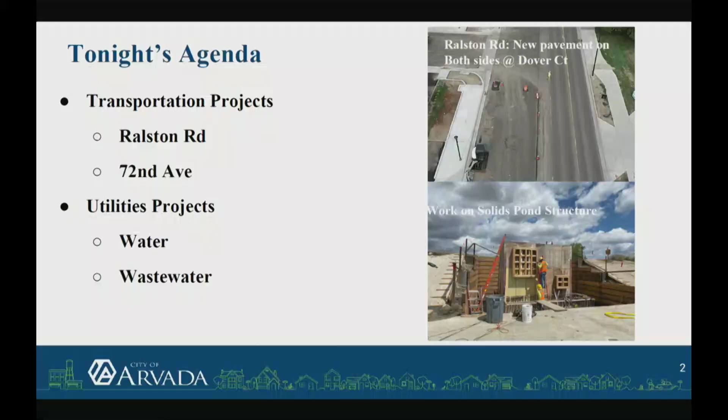He will kick it off and lead the presentation. Good evening, City Council, Mr. Mayor. Today we're going to talk about all our bond projects. Transportation projects, as well as all of our utility projects tonight. We'll go through our typical outline here. We'll talk about right-of-way, budget, construction phasing, schedule, challenges and risks, and community outreach.

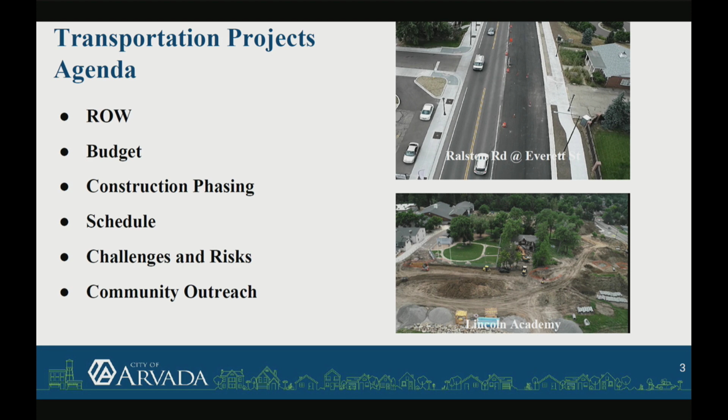And before I hand it over to Padmini to take it off with Ralston Road, I'd like to introduce David Bernard. He's one of our newer engineers, started in February with us, and he's been taking over the 72nd Avenue project since then. He comes with quite a number of years of experience in engineering, as well as geotechnical engineering, and has most recently been with Federal Lands, doing roadway projects kind of in the middle of nowhere. So now he's happy to be back in the Denver metro area where he lives. This is the opposite of the middle of nowhere. Exactly, yeah.

And with that, I will hand it off to Padmini for Ralston Road. Good evening, Mr. Mayor, and good evening, council members. Thanks, Britton. I'm very excited to give this quarter update on our Ralston Road Phase 2 project, because we actually completed a significant amount of above the ground work, which is visible to everyone.

So first I'll start my update with the right-of-way. We completed all the right-of-way requirements needed for the project, including temporary construction easements. We ended up spending 20% more than the initially allotted budget for the right-of-way requirements and services. Coming to the budget and expenditure, the initial budget allotted for this project is close to $19 million. The current expected budget, due to some of the design and right-of-way overruns, we are anticipating $22.5 million, which does not include the change orders we are currently negotiating with the contractor.

Coming to the construction phasing, this project is designed to construct in 3 different phases. The first is Notice to Proceed 1, where we plan to do a lot of utility relocations. Notice to Proceed 2 is planned for Estes to Yukon North Side widening. The bottom 2 lifts are already done. Garrison to Estes South Side widening was done recently. Moving on to NTP 3, the phase we are currently in, Garrison to Estes North Side widening, which was completed this quarter, and Estes to Yukon South Side widening, which is also in process. In the next couple of days, our contractor is planning on finishing up the remaining stretch of the south side widening bottom 2 lifts.

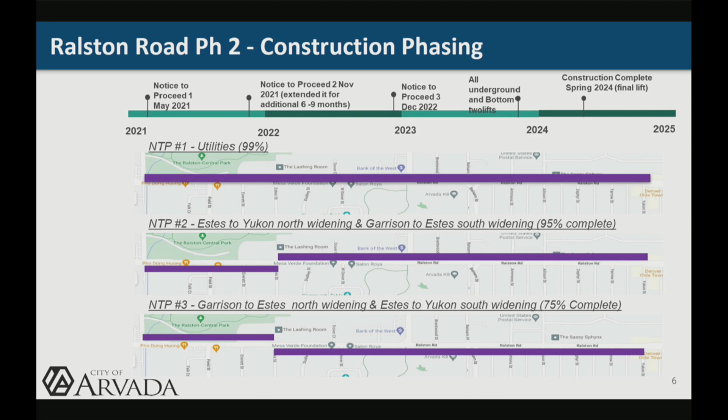Coming to the budget status and construction schedule, overall we spent about 84% of the project budget, which includes 97% of the total construction budget already spent until end of June. Right now, the contractor is pushing the completion date to spring of 2024. Some of the work, striping, some of the landscaping, maybe a little bit of the top lift. So right now we are still negotiating with our contractor to see how much of the work we can get done by end of this year.

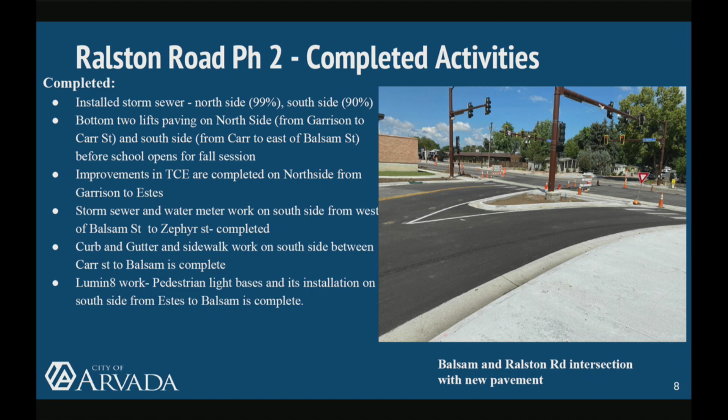Coming to the completed activities this quarter, as I mentioned, we did complete a significant amount of above the ground work. All the underground utilities are also complete. Bottom 2 lifts on the north side were also complete, and the bottom 2 lifts on the south side from Carr Street to Balsam Street were also complete before the school opening, so that we could open the Balsam Street intersection before the fall session starts. A lot of concrete work on the south side is also complete. Our contractor is planning to do bottom 2 lifts in the next 2 days, so with that we'll probably be done with the entire stretch of bottom 2 lifts paving on the entire project stretch. Once the concrete work is done, our contractor's third-party sub is working on finishing up the ped pole bases and also installing the pedestrian lights.

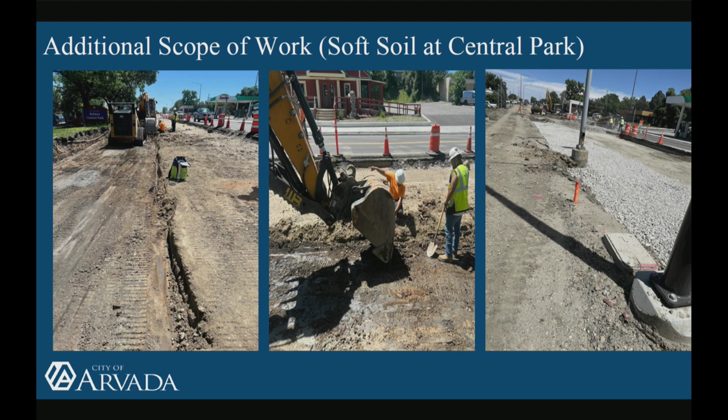There is still some additional work we encountered on the north side in front of Central Park, where we had some soft soil which is not suitable for road-base construction and pavement construction. We negotiated with our contractor and asked them to remove the additional soft soil and stabilize it before the road-base preparation. They were able to do that additional task, and this is how it looks after the bottom two lifts are done on the north side in front of Central Park.

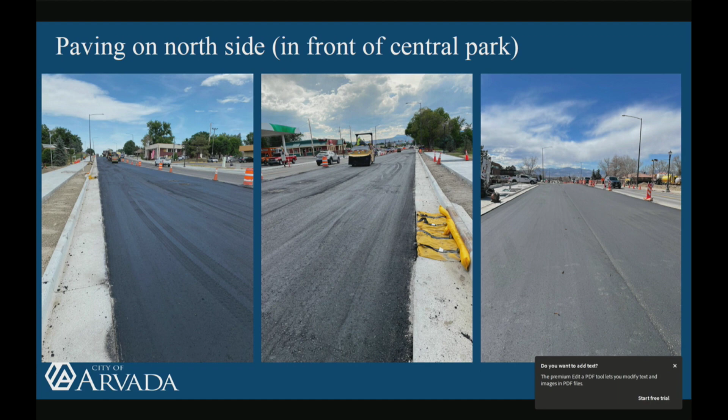Moving on to current and upcoming activities, a lot of the road-base preparation on the south side is currently ongoing, so they can get everything ready for paving in the next couple of days. Most of the curb and gutter work is also done on the south side. We have some sidewalk work remaining, planned in the next few weeks. Traffic has also been shifted to the outside lane so that the contractor can work on the medians at the same time while performing the road-base preparation.

99% of the stormwater work and the water meter relocations are all done. We just have Yukon Street left, since that's on the other end of the project. They're trying to finish up one last connection in the next couple of days.

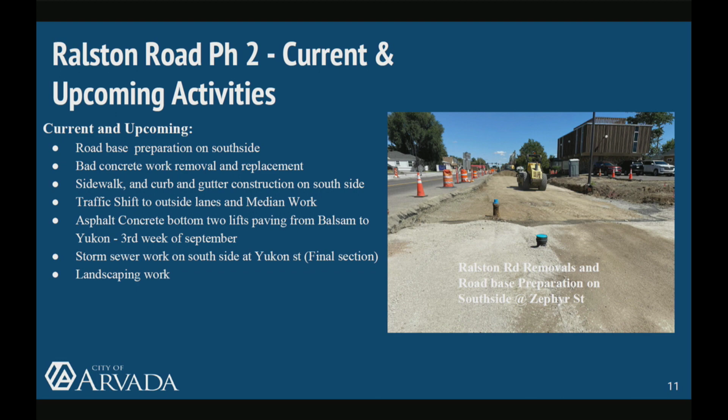The last piece of work they're working on is the landscaping and the type of trees coming into this project. They're working closely with our landscaping and parks department to get approvals on the type of plants and landscaping work they're going to do on this project.

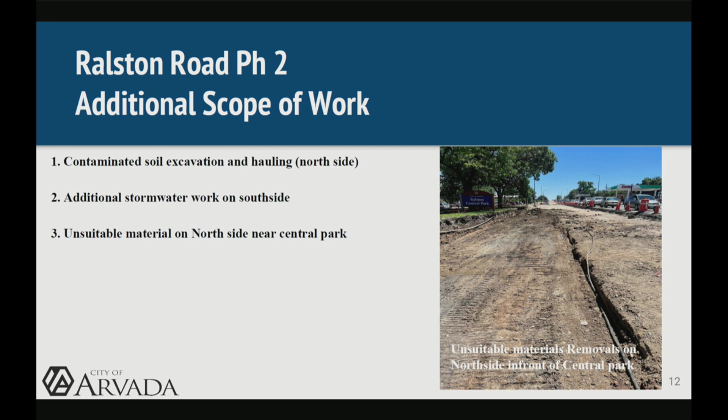Coming to the additional scope of work, two of the three items I already updated in my last quarter's updates. One item added to this list is unsuitable material, the soft soil that I already discussed on the north side in front of Central Park. Since we are very close to the end of the project, I don't anticipate any additions to this list.

Coming to the challenges and risks, this is pretty much the same slide as I presented before. I have just one or two items added to this list. Private utilities - in the initial stages, we had some delays in underground utility relocations, contaminated soil, and the additional stormwater work on this project. Addition to this is soft soil on the north side, which is additional work we encountered this quarter.

The third one is the development work. We already coordinated utility connections with two developers over the past year or so. Right now we are coordinating the Ralston Gardens development and their utility connections work, while continuously working on finishing up the Ralston Road project.

Last but not least, the public impacts associated with the road closures. Right now, on the southeast side of the roadway, all the side streets are closed from Balsam Street to Yarrow. We are trying our best to provide access to all the business owners, either from our Ralston side or the 57th Avenue side, while construction is ongoing. We do have a few complaints from business owners, and we are handling them one by one.

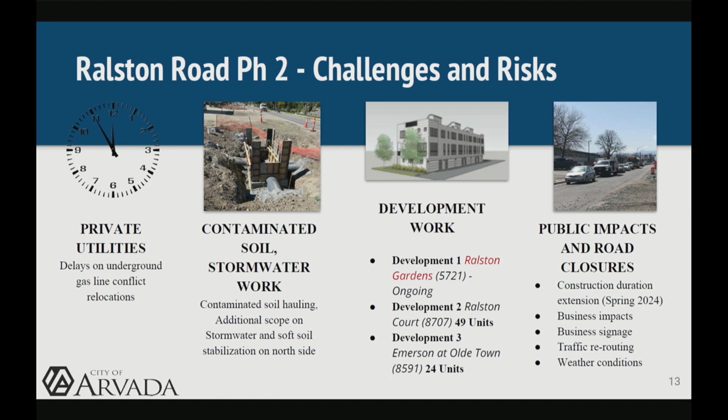Not only the roadway closures, we also have some complaints or scheduling issues related to the weather. This year especially, we saw a little bit more than average rainfall, which has caused some scheduling issues that may push work into next spring.

Moving on to community outreach, since there are a lot of road closures and upcoming work-related issues, both Hamon and the City of Arvada have public outreach officers and communication coordinators trying to inform all the business owners and stakeholders on the project on a weekly basis about upcoming road closures and any additional work that will impact business owners' schedules.

We are trying our best to communicate with the schools. Hamon also has a walk guard at the Balsam Street intersection to make sure kids are crossing safely during school starting and ending times. We are trying our best to communicate with all stakeholders about upcoming road closures and any delays related to closures or opening the streets.

So with that, I wanted to mention, as I did in the last update, we are anticipating the project would be complete by December 2023. We are still targeting that, but our contractor is pushing the completion date to spring 2024 with all the checklists and everything.

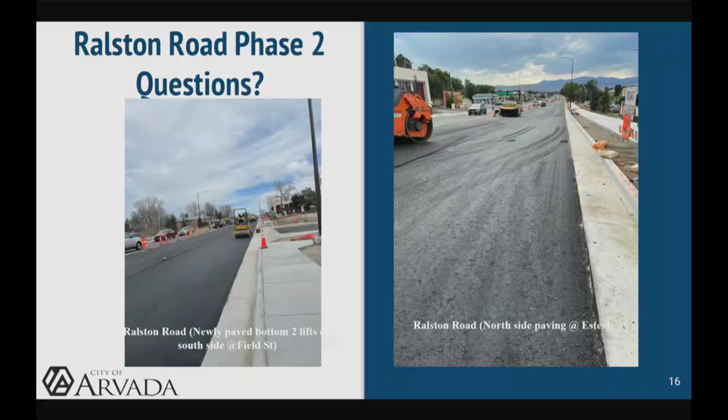Mr. Marriott? Thank you. I have a couple questions. So I see that when I drive through there, they're doing the medians on the west side of the project. Are there medians throughout, all the way through the extent of the whole project? Yes, we have 7 medians on the entire project stretch. Okay, and it looks to me like just the first 2 are under construction so far. Yes.

And I also understand we're a little bit under the gun timing-wise with the construction season for them to be able to do the final lift of asphalt, and obviously it looks like that will be done. That's the last thing that gets done to put down the surface that they actually drive on.

Yes. Okay, so the question I have is, if we don't get the final lifts of asphalt in before it gets too cold to do that, is there any plan in place for at least all of the lanes to be open when they can, so that as drivers drive on the road, their experience is better? They're not as hampered by single lane each way, lane shifts, and reduced movements and whatnot.

Yes, in the case we won't be able to complete the top lift by end of December, our plan is to see if we can open all the lanes to traffic with the bottom 2 lifts. Once the contractor comes back in April, we'll probably close 1 lane at a time when they're doing the construction. So we are trying to avoid a large public impact associated with any delays on the project.

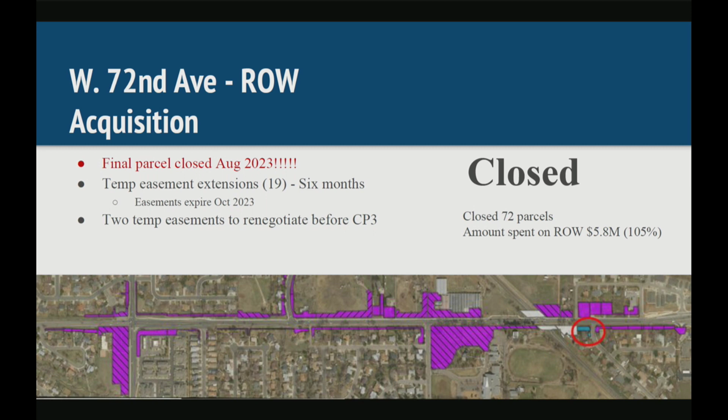And then there are 2 temporary easements on the CP3 side, adjacent to the railroad track, that we're going to let expire, but we'll have to renegotiate them once we have a solid date for when the CP3 and railroad underpass schedule starts. And the one thing I forgot - we're at about just over 105% of our budget for the right-of-way.

With the other numbers, we're just under 50% there for the total budget of the project. That's all 3 phases at this time.

And then the owner's rep, we're about to, later this month, bring a change order for them at the 16 October meeting, to extend their services for a year and add increased scope, with the hours and work that's gone into the project exceeding a little more of what was originally planned.

And then our design, the remaining 3% there is covering our changes in the field and design reviews of things we didn't expect. We're covering that pretty well at a couple thousand a month usually at this point, so we don't expect to change the money on that yet.

And we expect to extend the contract for another year at this point. It's more of a time issue than funds at this point.

And then with the different phases of the project, we had our construction package 1 finished up with about 11% left over there. And we're currently, did a lot of work this summer, so we're at about 2/3 of the way through our construction package 2.

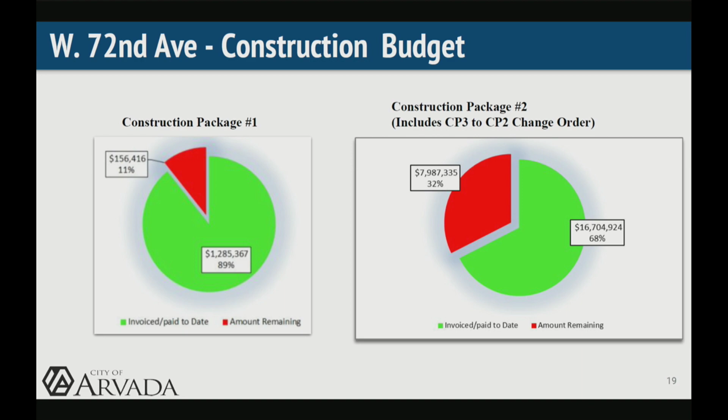The thing to note there is last month we put through our change order, which brought a lot of the CP3 money that was adjacent to Lincoln Academy and Oak Street, which are kind of the boundary between CP2 and CP3. We brought a lot of those items into CP2, so we made the pie bigger and got a lot of that work done this summer. But that's money we're not going to be spending later on in CP3, so it's more of just a transfer.

And as far as the phasing here, CP1 was the utilities, which are overall about 90% complete of relocating all the utilities throughout this stretch.

And then we have CP2 from Swadley to Oak, which should be finished in the spring of 2024. We're hoping to have the majority of the work finished here before winter starts and we're not able to pave anymore. We hope to get all that temperature-dependent work finished towards the end of the fall here.

And with the planning, the design phase of CP3 taking a lot longer, we're going to have a bit of a gap between the end of CP2 and CP3, which would be everything roughly from Oak to Kipling, including, mainly the underpass. Looking at the planning right now with that change order, we brought as much as we think we could get done ahead of time into CP2 this summer.

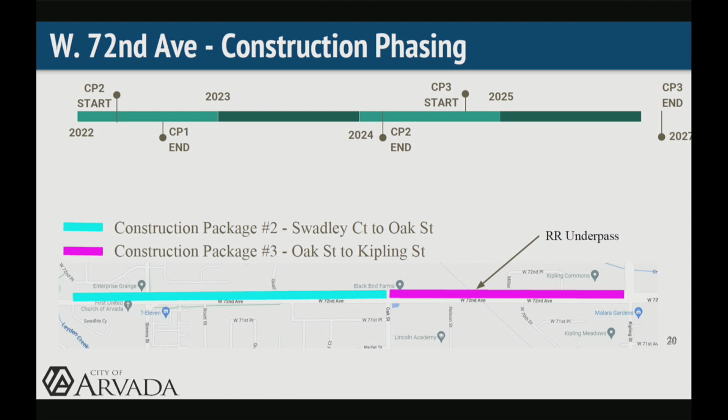And then just go through some quick pictures here.

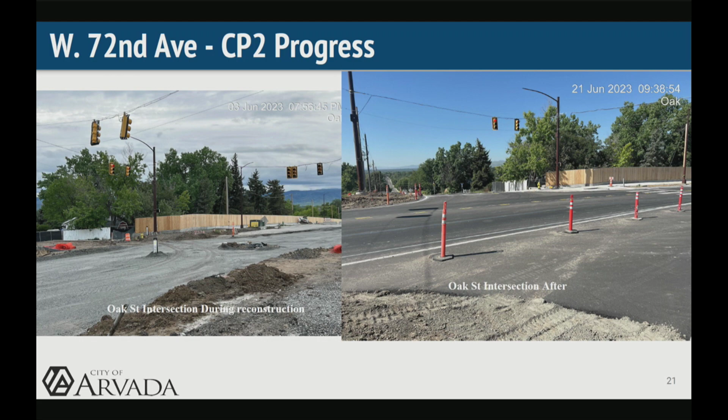Similar to before, we had record rainfall all spring, so we had a lot of delays. We're trying to do dirt work, and every time it rained it becomes a mud pit, and we have to clean up because our storm network isn't set up correctly yet on the road during construction. We have to go clean up where the runoff takes the dirt and extra gravel onto other places every time it rains. So that delayed our project several times during May, June, and a couple times in July and August.

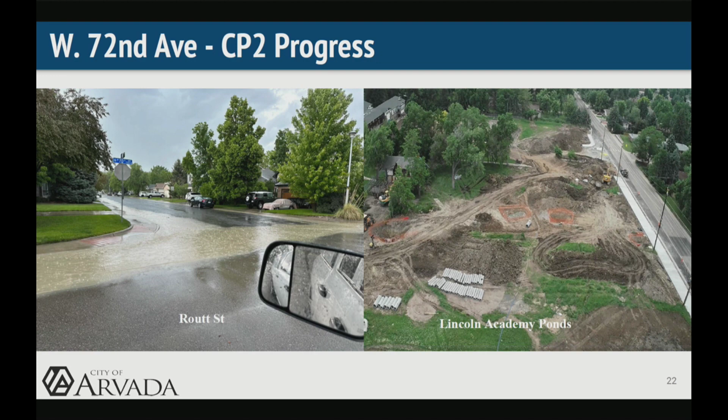The goal here was as soon as school was out, we closed Oak Street, got the intersection done, and started working on Lincoln Academy. With the weather delays, it was a race to get all this work finished before school started again in the fall, or at least get it to a point where we could safely open it to the staff and students of the school.

And what we did, we have the entrances on the north. It has to shift that to the west a little bit because of the underpass that's going to go in there.

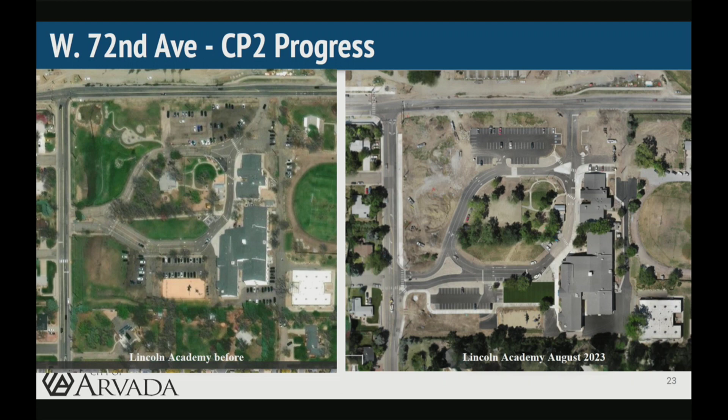Okay. Oh, I appreciate that. Thank you for that clarification.

I just want to point out what a good job by you guys working with someone who's obviously affected by the construction we're doing, but that gets a very large positive out of it. I mean, when you look at these two pictures, you can see the dramatic improvement for Lincoln Academy, and our cooperation with that helped them probably achieve all these big improvements at a lesser cost than if it was just them. A good example of you guys being really good neighbors, or us being really good neighbors to the people along here who we are affecting with this construction.

And that's one thing I try to stress too, is this job's all about partnering. That was a big thing in my previous job, partnering with our customers, which in this case are the residents. And this is one of the biggest partnering examples on this project probably.

But when I mentioned there was those 72 parcels that were closed and right-of-ways taken as part of this project, that's 72 individual partnerships, and each one is its own little mini project, some more complicated than others. This is on a grand scale, but we're also doing that on a backyard kind of scale in 50 other locations as well. And that's a huge part of what we're trying to sell this as, as well as promote the work that we're doing here as an improvement to the entire neighborhood, not just the city forcing this on people - that's the approach I've been trying to take the whole time.

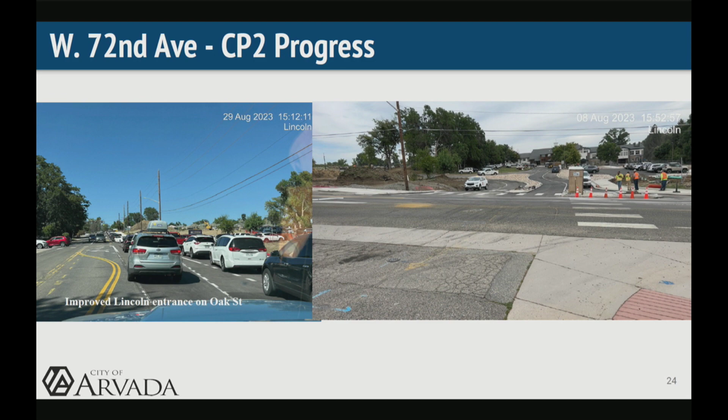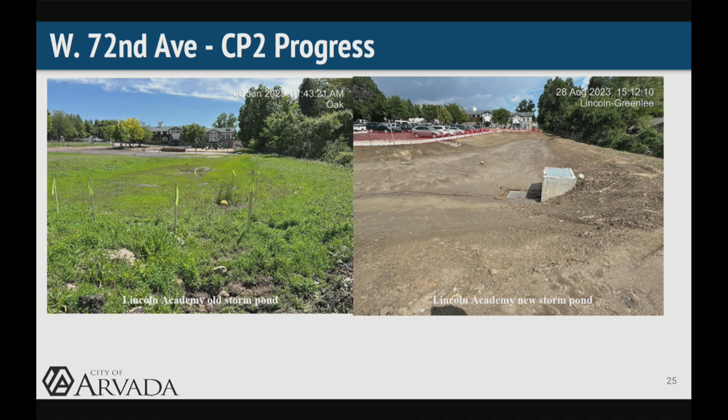And then this is one of the storm ponds before. We've increased the capacity on the right side and put in a better inlet structure. So now, especially with the rains this past spring, it's better management and control of the water to prevent some of the neighbors from flooding out here on this hillside.

And on the rest of the project, we have our walls on the east side that we installed, and on the west side, on the north part of the project.

On the wall E on the left picture, there's going to be a sidewalk and bike lane down in front of it. And on the right side, the sidewalk and bike lane is going to be up on the wall in between that white fence, which is one of those resident partnerships we had.

They wanted us to replace their fence as it was rather than the standard fence. They had a white fence similar to that at first, and we had to do a lot of design and negotiation with the contractor, the subcontractors, as well as the residents to get this reset as close to normal as possible.

Because it was a retirement project for these neighbors when they built it, probably 10 to 15 years ago when they retired. And then the biggest change was we were able to pave a couple weeks ago. We closed Simms for about a week and paved the north part of Simms, as well as the whole north half of West 72nd there, got the first 2 lifts on. And just like Padmini was saying, we got to wait till the end to put on the final lift.

So hopefully we're going to do a similar thing of splitting the traffic and working on the medians. This gives us some more flexibility to keep traffic going, working around, but we're still going to mainly have just the 1 lane in each direction open. It's not fully open yet, but there's more flexibility to keep the work going and fewer closures going forward.

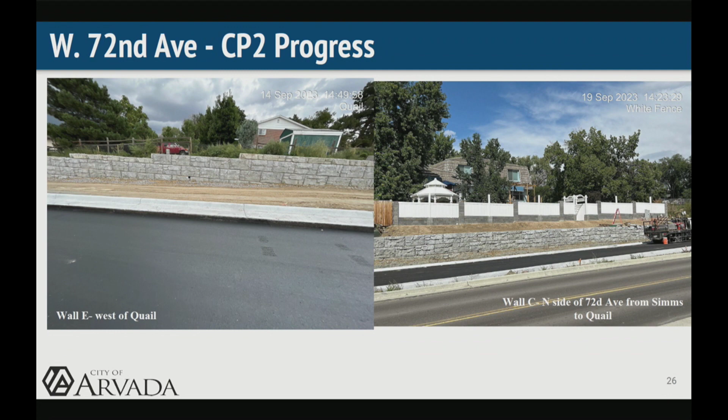Ms. Simpson's got a question. It's not a question, I actually just wanted to say the white fence is beautiful, and I kind of wish we'd done that all the way along. It's very attractively done, well done. Appreciate it. Yeah, we're working on getting that finalized, and there is a price to pay with that well done, of course, and that's the trade-off there.

So like we said, upcoming work, another one of our mini projects, we're starting to work on the First United Church of Arvada, which is the southwest corner of Simms. They're getting a bigger parking lot and a different entrance to better manage traffic on the road.

We're putting in the sidewalk on the north side right now, clearing that area. Start pouring that in a couple weeks, and then finishing the permanent fencing along with that, including that white fence there. And soon we'll be working on the medians.

And then our north extension of Oak, the new road is going into the 2 properties there to help promote the development on those 2 lots. And then like I said, the final lift across the entire site.

So sometime in the next few weeks, right now it's looking like October 9th, we're going to have a closure on the south side of Simms to do some utilities work that needs to be done. We're ironing out the details of that closure right now, but it's going to be more or less a mirror of the closure we had last week or two weeks ago.

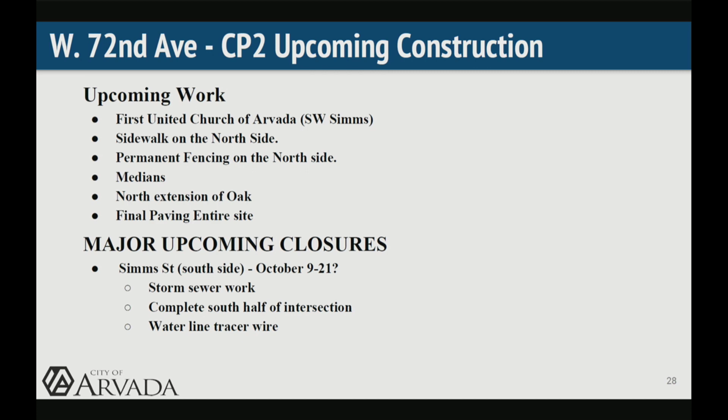And hopefully we shouldn't really have any major closures after this. It should be our final major closure, knock on wood.

And then with CP3, the major portion of that is the railroad bridge. Just on September 14th, we got our 60% bridge plans approved with conditions. So that was a huge milestone.

And I got to thank we got a lot of people on this side of the room as well that helped out. We reached out to the senator and the congressman for the area as well, and that helped out and got this on the radar of a lot of people.

And so now we're starting on the 25% detour and shoofly plans, and hopefully get a site visit concurrently at the same time. And we're communicating with the representatives of the railroad now, the review team for the railroad, and that was where a lot of the pressure from the higher ups here helped with that.

And things are moving along, but it's still a long way to go. We have to get all these other benchmarks in the design approved and everything corrected. So that's a huge step.

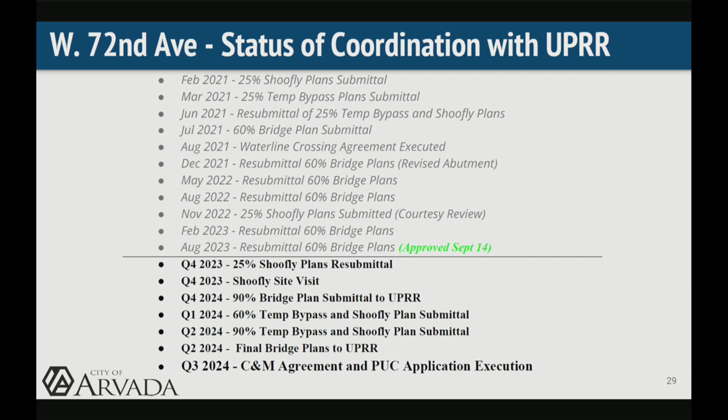That's the rough schedule now. Based on that, we're hoping to maybe start work in the third quarter of 2024 on the CP3 portion. And that's to illustrate that right now. And with the latest schedule we got from the contractor, including all those future design milestones, we're looking at second quarter or third quarter of 2027 to finish the construction on the CP3 portion.

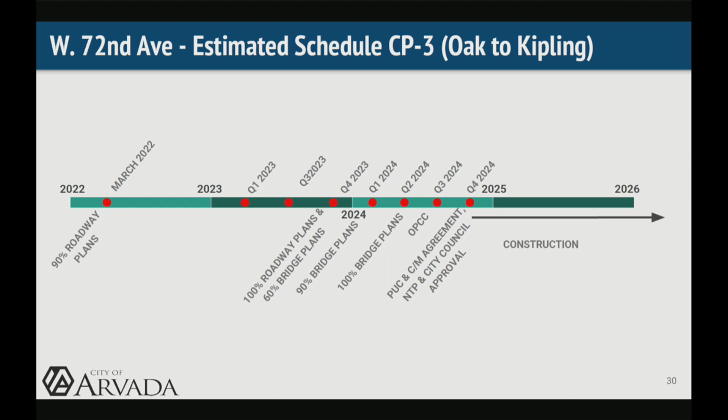Challenges and risks, covered the railroad pretty well. And hopefully in that process, we're looking to get the bridge design finalized where we can order the steel, because that's a year out in today's world to manufacture stuff like that.

When we talk about our costs and our price going up, it's primarily because of the cost of everything that's gone up since 2018. Essentially, you could see the same increases when your grocery bills too, is what I compare that to.

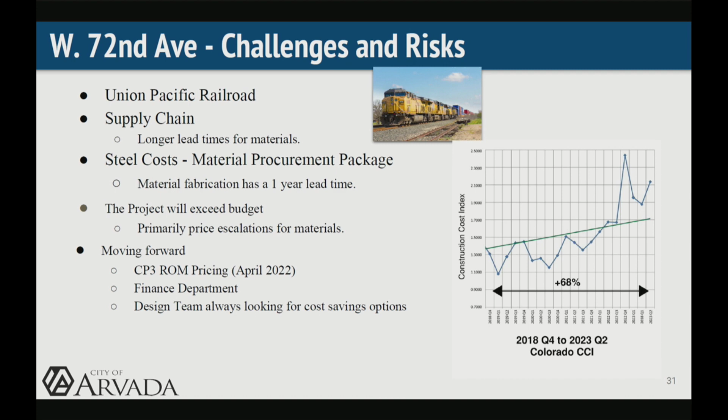With our citizens, we're always getting phone calls and emails from everyone, and the general concern over the summer is that all the Lincoln work, no one was really seeing that. People just drive Simms every day, so they just see nothing going on, and people were getting very upset that the project wasn't getting anywhere.

So I was getting on the phone where I could and communicate that to the people, as well as our other communication staff that support us on that. And like I said before, hopefully just one more road closure for Simms.

Then we had the fences, which are a big deal for a lot of people. We got most of the fences in right now, probably about 5 or 6 left out of all the properties that got them. And we've had some utility strikes throughout the project, so it's important people let us know when that's happened so we can get it fixed as soon as possible.

Then there's the driveway access with some of the older properties along the area, their driveways are directly on 72nd, and getting the work done while allowing them to still go to work and school has been challenging at times, and interrupting people's routines is not a good thing. So it's just constant communication with my inspection staff and myself, as well as the communications people supporting the project.

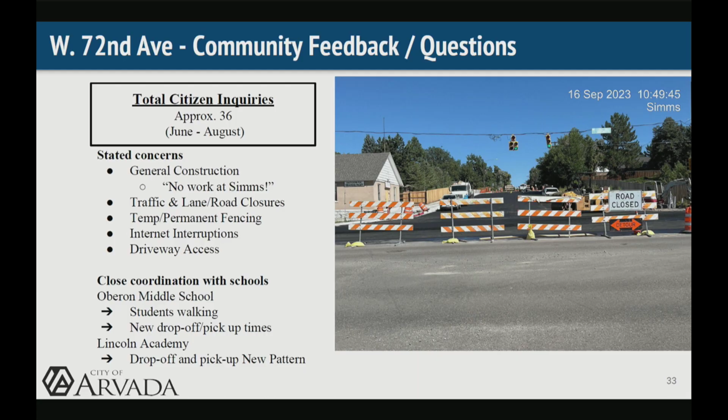With the schools, we're always contacting them, and the biggest thing now is with Oberon. The students have to cross through the project site, and keeping those corridors safe has been a big communication point with the school, as well as daily checking with the contractor to make sure things are okay.

They actually got new drop-off and pickup times, which have helped the traffic a lot, especially with our closures when the detours go through the Oberon neighborhood. And with Lincoln Academy, as I showed before, they got the new drop-off and pickup pattern, and we're looking at how, once we get the road detour in place, we can manage keeping that traffic flowing during the Lincoln times.

And that's it for me.

Thank you. Mr. Mormon's got a question. I've got a couple, if that's all right.

First of all, I really appreciate the team's work. I understand the enormity of this project, and I do believe that someday it will be done, and we will all then be able to appreciate the improvements that this is making in our community.

My first question, just to clarify, when you were showing the schedule of CP2 and CP3 and talking about the gap that'll happen between when they're finished, do I have it correct that CP2 and Simms in particular will be all finished by this spring? Did I have that right? Yes, everything. That's our goal, to get the section from Oak to Swadley complete, hopefully late this fall, and then the landscaping and minor details in the spring once the weather turns.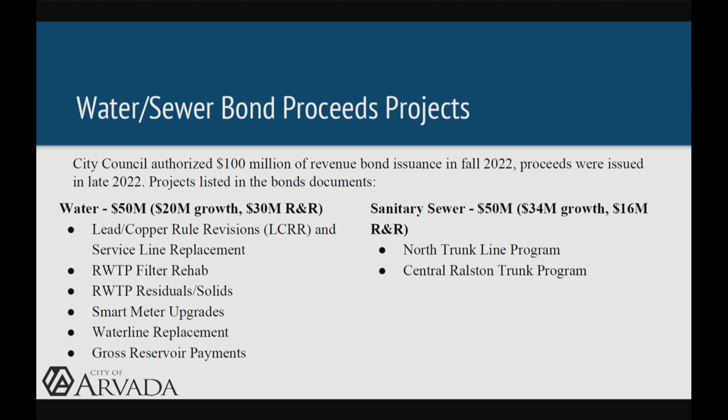On the water side, it's the lead and copper rule, the filter solids project out at the treatment plant, smart meters, water lines, and then Gross Reservoir, with about 40% of that money going toward growth, which is Gross Reservoir, and the remaining money going toward R&R projects. The sanitary sewer money is going to the interceptors for capacity reasons - I'll get into that a bit in a minute - with capacity money being defined as about 1/3 R&R and 2/3 growth, because we could line the pipes if we didn't need to make them bigger or better. So there's a split there. So, water projects.

There's not any major changes from what I presented in June, and things are moving along. That's somewhat to be expected. We knew this, that when the water bond was issued, we were mostly in construction for 40 of the 50 million.

Quick question around the bonding for gross reservoir. Can you refresh my memory on that? Because I thought we pretty much kept all that money. I don't know if we actually saved it up over the years. I didn't know we were bonding some of the gross reservoir, unless we shuffled money around to pay for one thing to another.

Did you move color of money, Brian? Is that what that is? Or Brian? Okay. Yeah, absolutely.

From a timing perspective, it made sense for us to move some dollars around. So we needed to use some of the money we had saved up for emergency projects from the last couple of years, and then we offset that with bond dollars for gross.

Okay, and I get sometimes we just change the color of the money to make it work, but I don't remember seeing it on here like that, so thank you. We try to get better each time.

This bar chart's slightly different than the ones I've presented before, but it's similar information. First one is the 50 million in bond. The second one, which I've shown before, is the total need for the bond projects. And then that last bar has been added, which is the utility need through 2025, the next 2 years.

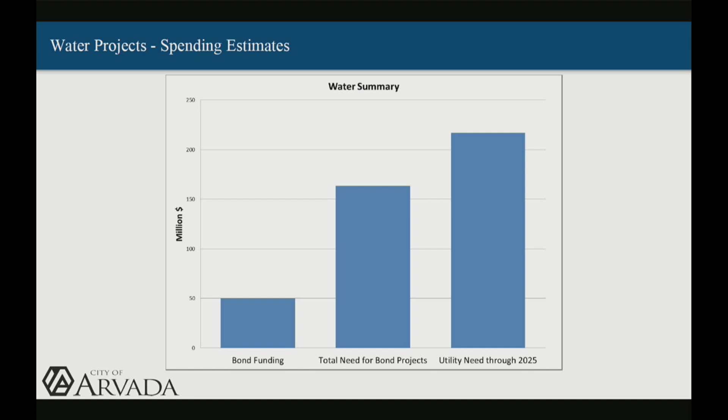This graph is essentially the same as what I've presented before, with an addition of a line in time, so that we continue to track as we move forward. Again, not a lot of changes on the water side, since so much was already in construction when the bonds were issued.

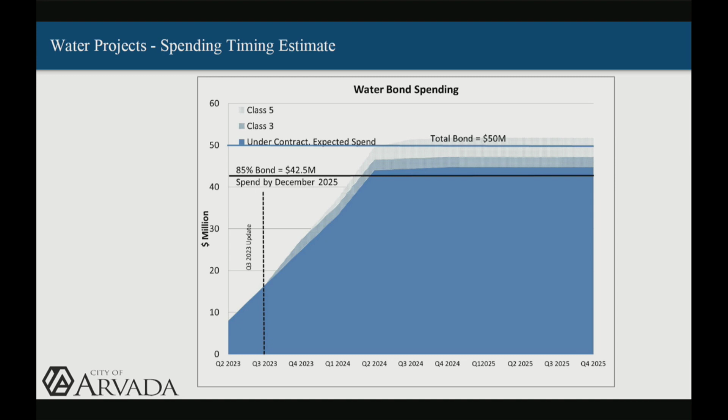Sewer. I'm going to get really excited about sewer, because there's really exciting stuff to share.

We started with 9 projects identified as potentially being funded by the bonds. We are at 8 because we did have some inflation and complications that caused project increases. But of those 8 projects, 6 are ongoing, so we are continuing to march forward with those.

The other super exciting one is CRT 6, which is 69th and Ward. It did not have a good first bid - we only got 1 bidder, and they were not qualified. But when we rebid the project, we got 6 bidders with a great number that is less than the engineer's estimate, and that was last Wednesday. So we are super, super excited. You won't see that till November though, because it just has to do with how long it takes us to get things going, but super excited.

The other one I'm super excited to share on this is NTL 7. That's 76th and Sheridan, where we popped the maintenance holes and everyone went, oh wow, that's really close. That is - I say it's now under design. You guys are actually going to see the contract with the consultant next Monday, but I think that's close enough to say we're under design, so I moved it forward.

Could you do me a favor? There's a lot of acronyms on this one. Sure. And then also, can you explain what Class 5 is and Class 3 is?

Absolutely. So NTL is North Trunk Line. CRT is Central Ralston Trunk Line. North Trunk Line is that top third of the city. Central is the middle part of the city.

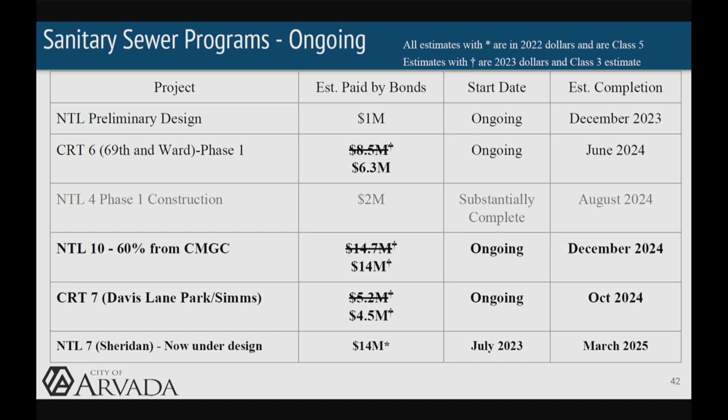Class 5 means conceptual. We know we have a project, but it's rule of thumb - it's dollar per linear foot, those kinds of things - so it's pretty high level with quite a bit of risk, and it reflects a number that can be plus 100% or minus 50%. Class 3 is where you're at about 60% design, so you have a lot more project definition, which means you have less risk in your cost.

Mary, real quick, just with the handful of months of delay there—the March 2025—is that the original estimated completion date, or is that the new one with December? That's the original, so it may also shift, but we'll see. Thank you, Mary. Yes.

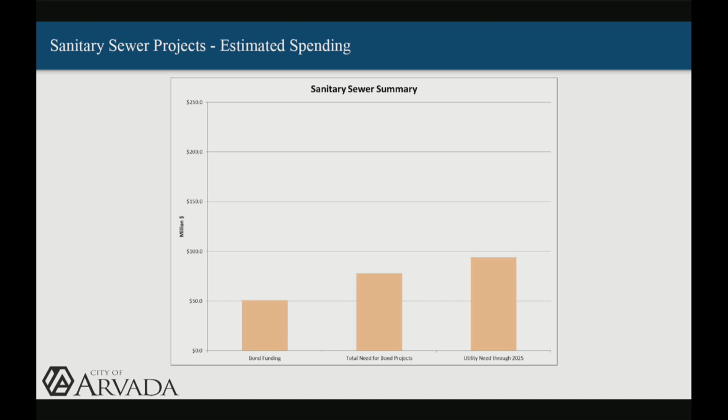And then the other piece in terms of utility need is the master planning was on capacity, not on condition. We are advertising this week for some help to understand the condition of the Central Ralston trunk line. Vast chunks of the Central Ralston trunk line are big enough in diameter—they are also clay pipe, VCP pipe, and 50-plus years old. So our crews don't have a camera trolley that can do large diameter, so we're going out to a contractor to help us with that, because we really don't have a good idea on condition on that Central Ralston trunk in places.

Again, this is very similar to what was presented last time, with an addition of a line on date. That bottom line indicating under contract looks flat, and that's because I didn't put CRT 6 in yet—the one we just got the bid on—because we're still 6+ weeks from actually having a contract. So once we put that in, it'll start popping up and take out some of that Class 3 piece.

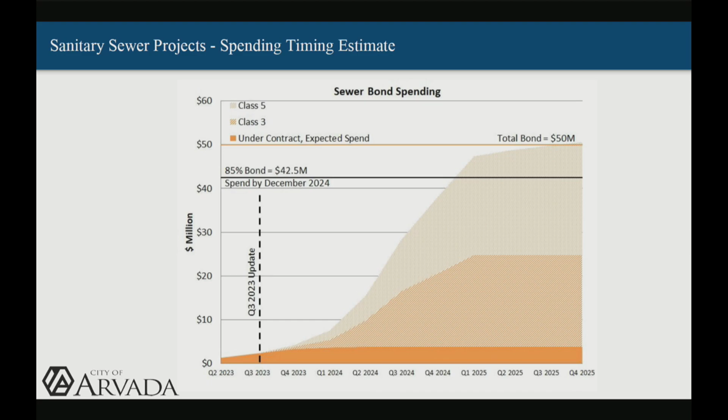Priority projects: Alkire Lift Station is the only one that's not bond funded, and that's because it is being funded by the Metro District. But it is on track to be done by the end of the year, which is what we had projected. Construction has started, and the best news of all is that our electrical equipment has been delivered to the contractor. That's probably our biggest risk item on schedule right now in the water wastewater field—electrical. So we are on track for completing by the end of the year.

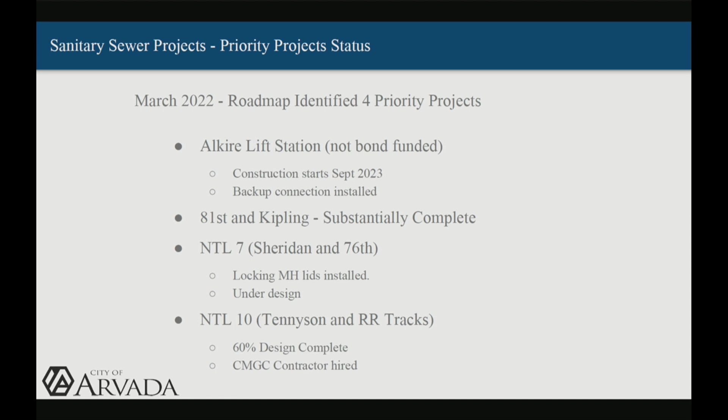Which Metro District is paying for that? Alkire Lift Station? JCMD. JCMD, okay.

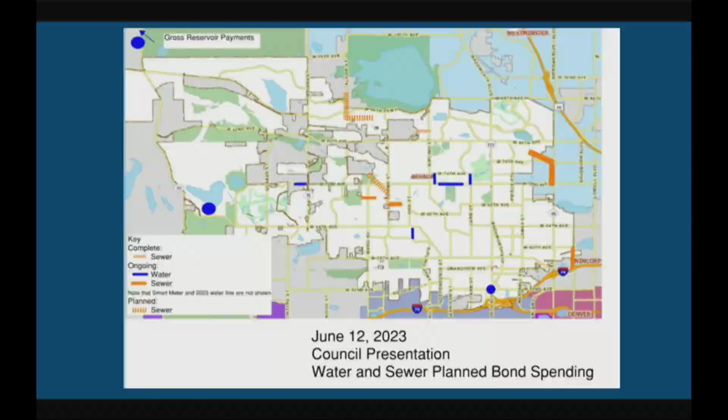And it looks beautiful, by the way. Thank you—my neighbors are like, the park looks better now than it did before. Thank you. I know the path is better because we made it wider, and that was one of those win-wins we tried to work on with parks.

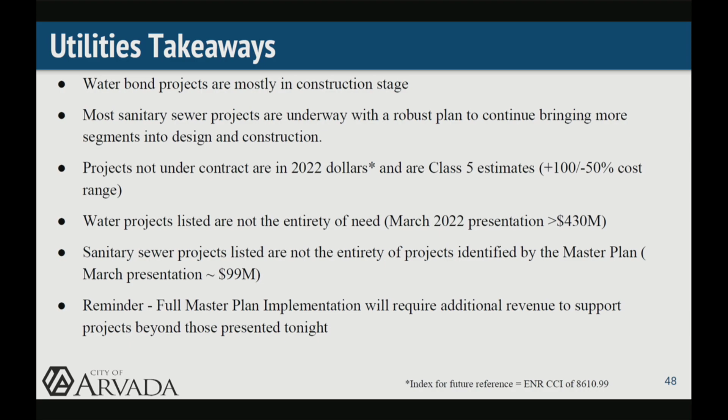Our takeaways have not changed from previous presentations, with the reminder that sanitary sewer projects were lagging the water when we got the bonds. We're doing our best to keep them moving forward. As I said, super excited—we're at 6 of 8 right now. And some of our dollar estimates are still Class 5 or Class 3, but we'll get there. And a reminder that our implementation plan was more than this first bond issuance. And that is it, other than questions.

Mr. Marriott. Yeah, so I have a question.

I believe there's either plans for, under construction, or maybe it's done, a wastewater interceptor line from out west to avoid the lift station at Alkire. Can you update us on the status of that, where that's at, and how that fits into all this stuff we just talked about tonight?

Absolutely, I'll ask Jenny to speak up if I get it wrong. There's actually two pieces. One was built by the Metro District along Highway 72, and the next piece is being built by the Trailstone developer through their development up towards Candelas Parkway. The JCMD piece is done, and the Trailstone piece is probably 75-80% done, so they'll complete that as they develop.

That I'm going to have to defer. They will have to get that line completely finished before we issue building permits and occupy any of those Taylor Morrison homes. It's part of our development agreement with them, but it's well under construction right now.